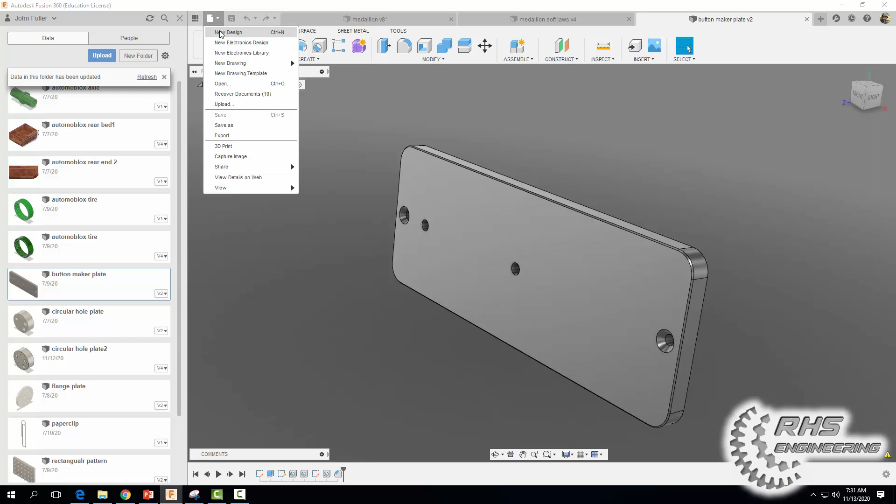Come on up to File and let's select New Design. And as we always do, let's create a sketch here on our XY plane.

First thing we're going to do now is come on up to Create and we're going to draw out a center rectangle. We want that rectangle to be 4 inches. Hit the Tab button by 11 inches. Enter. I'm going to close out my data panel here.

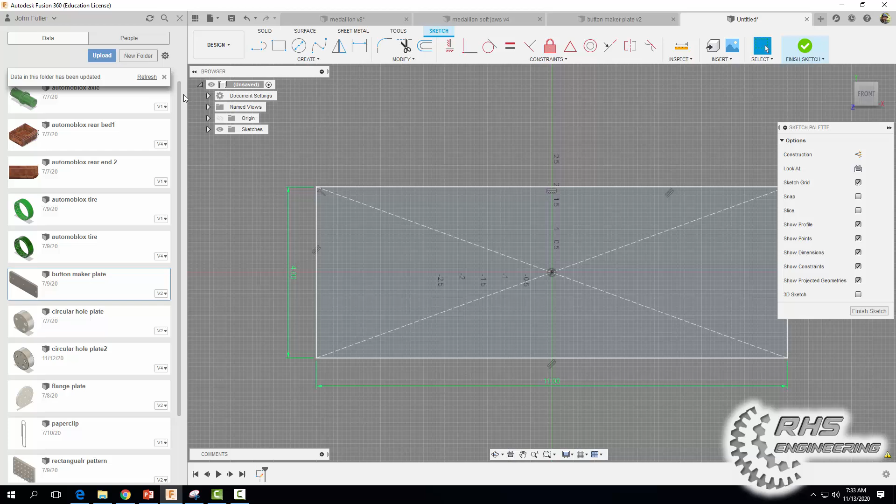And we're going to go ahead now and throw on some fillets here, 4 of them, and we want them to be 0.5. Go ahead and hit enter.

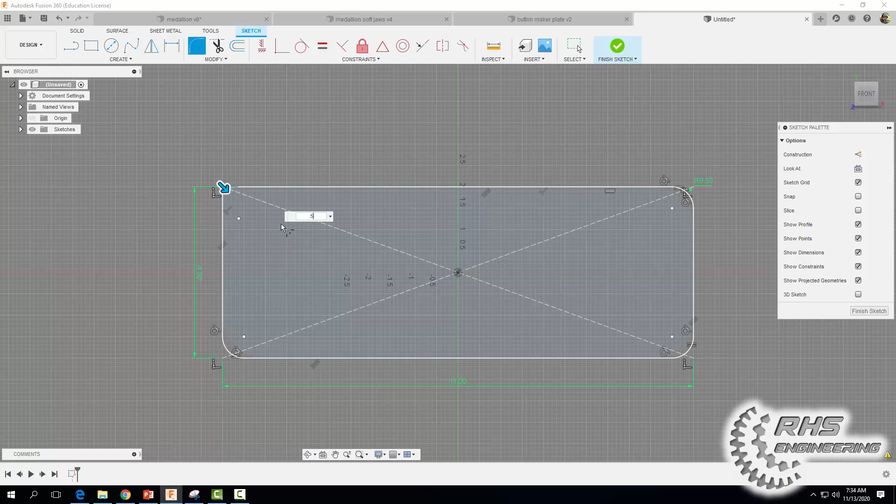Okay, I'm going to hit escape now and just basically delete these construction lines. I'm going to go ahead now and finish my sketch, and extrude out this rectangle to be 0.5 inches here, and hit OK.

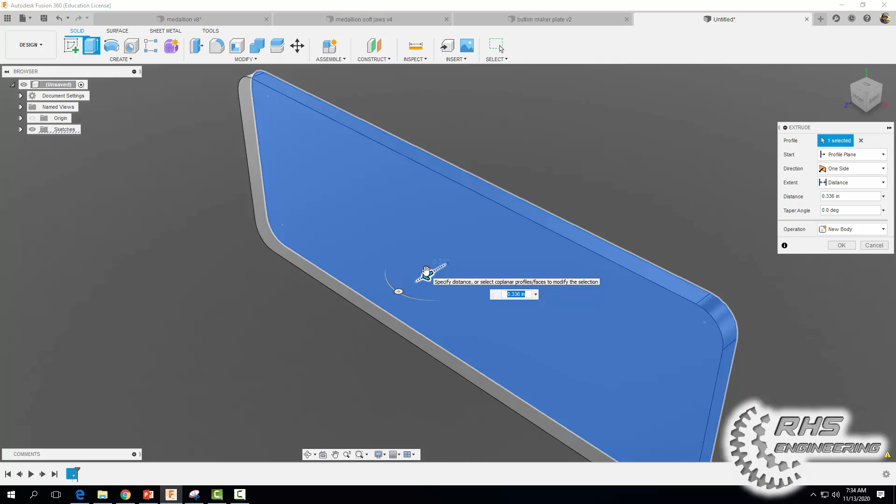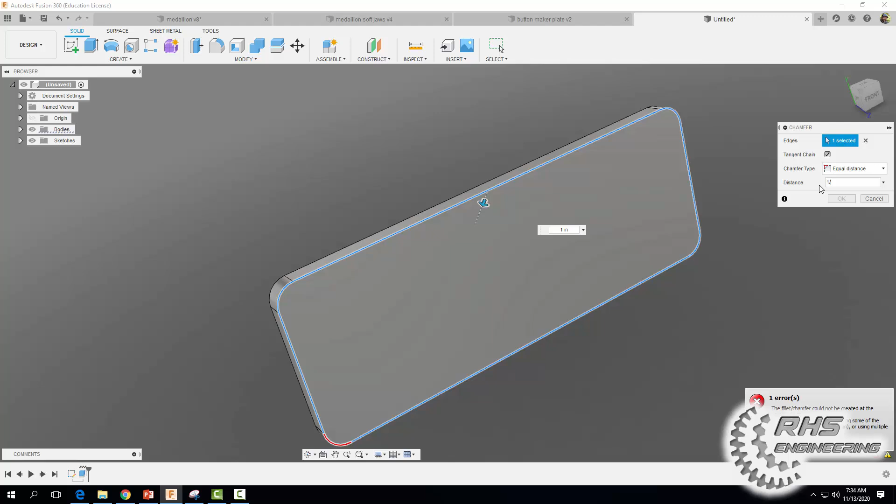Okay, one of the features we need to add is a chamfer along the outer edge here. So we're going to go to Modify, Chamfer, and I'm going to select the outer edge, and we want that to be 1 divided by 32. Okay, and hit OK.

So let's come on over to Fusion 360 again. I'm going to create a sketch right here, and I'm going to zoom in a bit.

We're going to come on up to Create now, and we're going to make a point here, and I'm going to find my midpoint here, well, just which is pretty much right here since we made a center rectangle, and I'm just going to kind of click right over here.

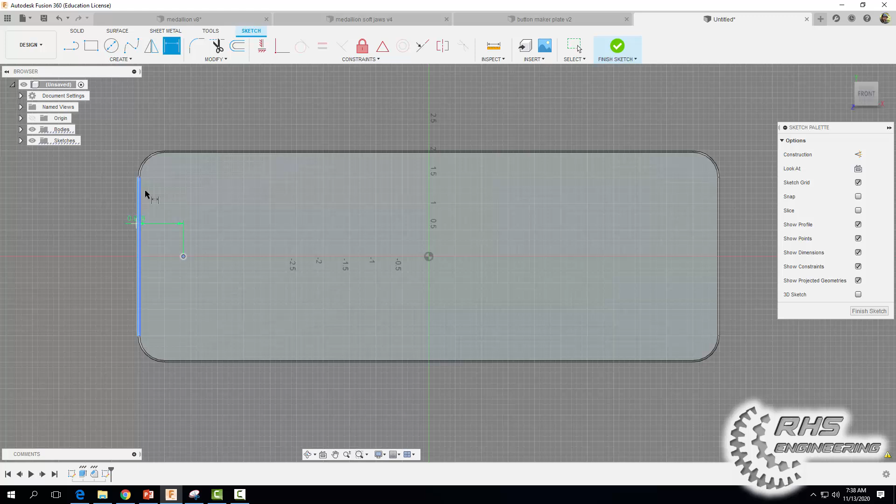I'm going to hit escape, and I want to dimension that guy now from this outer edge to be 0.4375 inches. And then from the top here down to this edge, I want it to be 2 inches. Enter. Now I'm going to go ahead and finish my sketch.

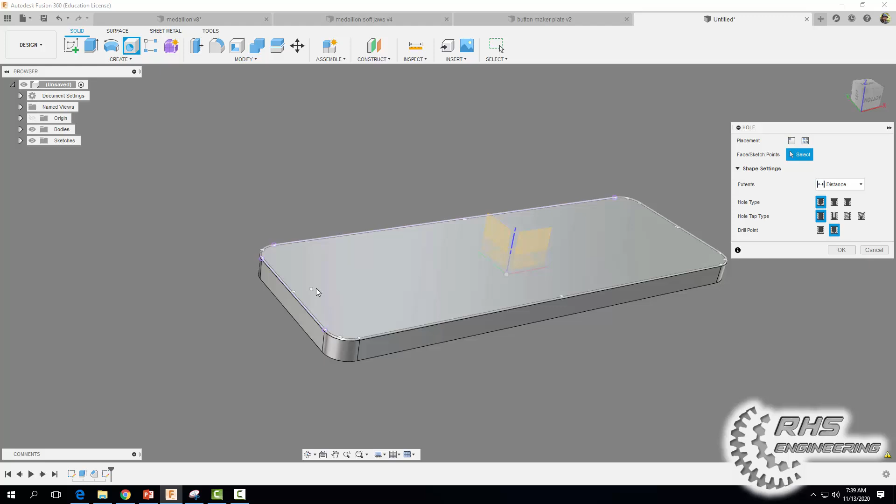And we're going to come on up now to Create again. Actually, we can just select our hole right here, and I'm just going to select on that point we just made. But now we got to go adjust some settings here.

So we want to make a countersink hole. We want this outer diameter to be 0.5. And we want this inner diameter here of this hole to be 0.25. We want to make sure that it's 82 degrees, which is already set with our default value, and we want it to be a distance all the way, then hit OK.

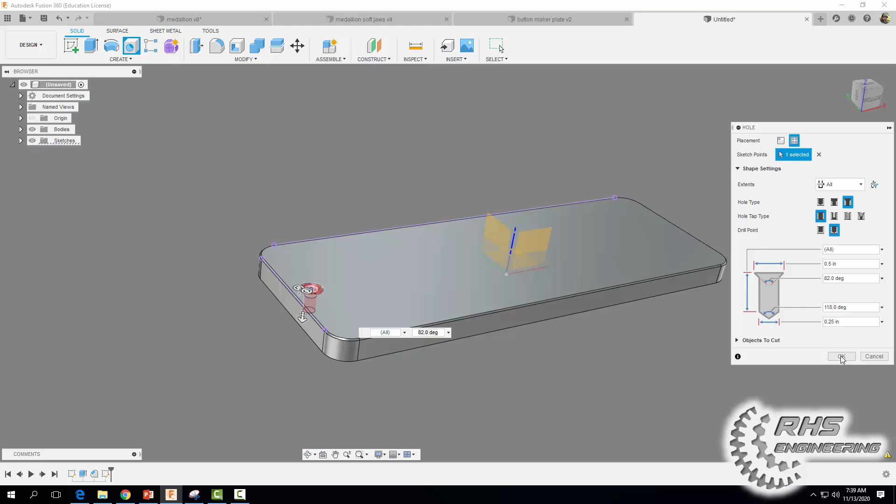So recall, we need to make 2 of them, 1 here and 1 over here. So let's go do that.

All right, so the first thing we're going to do now is come on up to Create. We're going to select a mirror, and it's going to ask what do we want to mirror. We're going to select our hole here. So go to Features, then select our hole, and then our mirror plane.

Well, we want to come on over here. Remember when we start a sketch at the beginning of every lesson, there's 3 planes. Well, those 3 planes are located right here, okay?

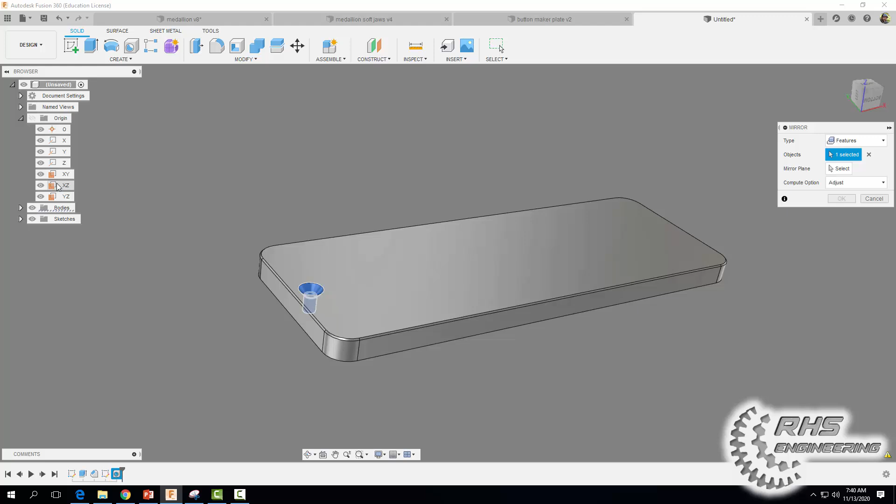And if you click on them, okay, let's go to select here. You can see them, and we want to mirror with this guy right here. So we got to figure out which one that is. That one, that right there, YZ, and hit OK. So we just now made our second hole. A lot easier than the first one, right?

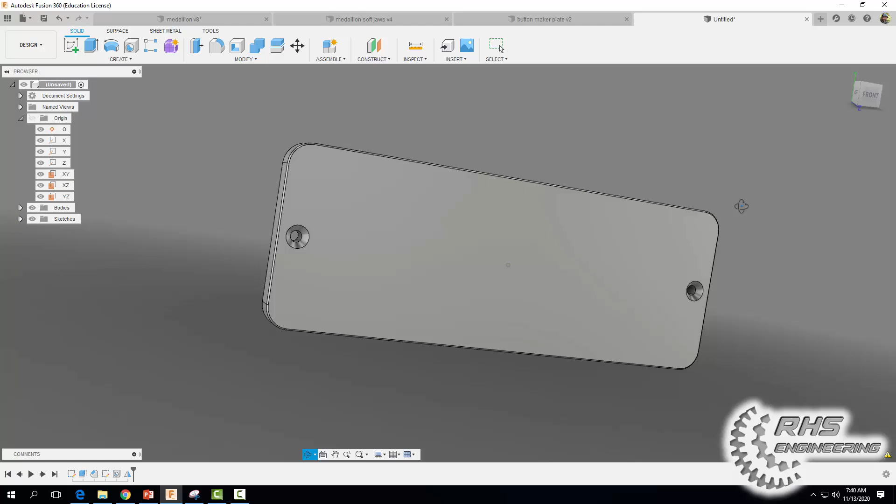All right, so the next thing we need to do is make these 2 holes right here, and both of these are through holes with a diameter of 0.3125 times 2, so 2 of them. So let's come on back to Fusion 360. Let's start a sketch once again on this face, and what we're going to do is once again come up to create and make a point here, and I'm going to just find my origin, and I'm going to drag my mouse out across, and I'm going to place a point, roughly in this area, and then I'm going to do the same thing right back at my origin. So I have 2 points here. I'm going to hit escape.

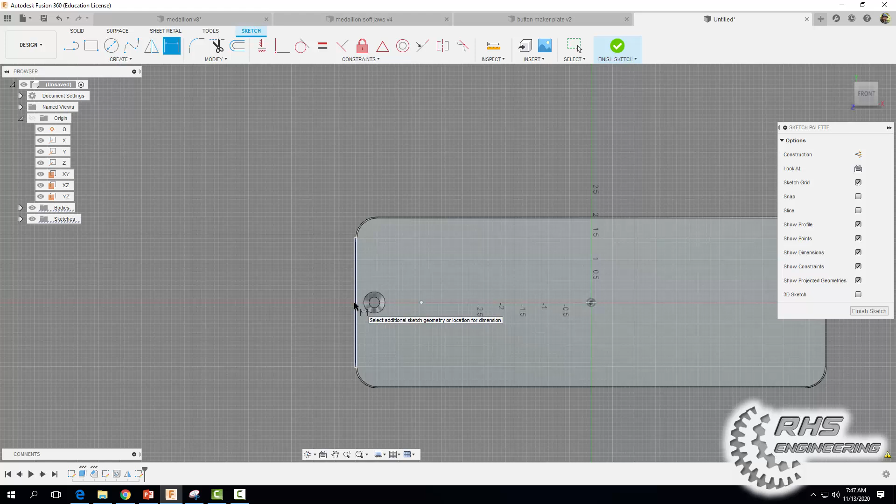All right, we need to dimension this one from this outer edge here. Be careful, don't use the chamfer edge there. Use from the outer edge to here, we're going to make that distance 1.5. And then let me just double check this distance, make sure it says 5.5. Yep. Okay, and if you didn't put it right here at the origin, make sure they're dimensioned 2 inches from the top edge here. Okay, I'm going to go ahead now and finish my sketch.

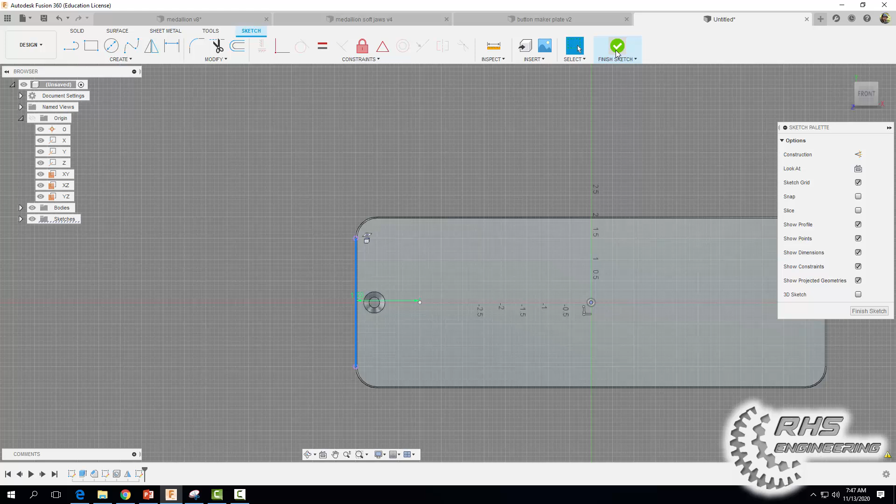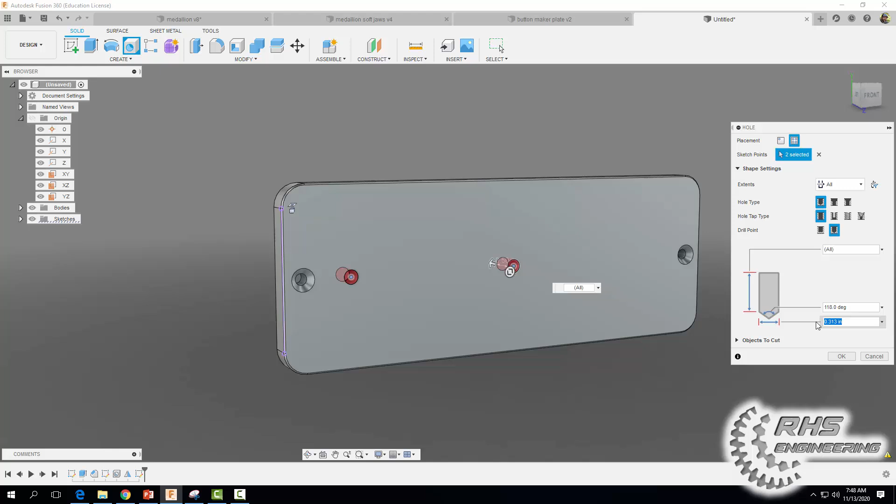I'm going to come down over here to hole, and notice it already picks one of them. I'm going to hold down shift now, and I'm going to click again here on this point. Okay, and we need to change some things here. We need to make a simple hole, all right, with a distance all the way through with a diameter of 0.3125. Hit OK.

And the last thing we need to do are make these 4 holes in these corners here. And these are threaded holes. They have a thread of 8-32 UNC with a depth of 0.2875. And we need to make 4 of them, right? So let's come on back. Once again, let's start our sketch here on the surface. Okay, I'm going to come up to create, and I'm going to come down to project.

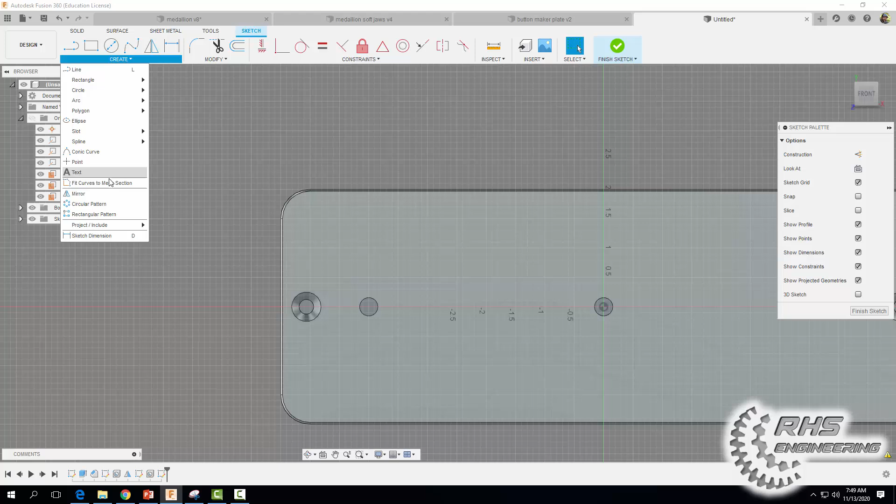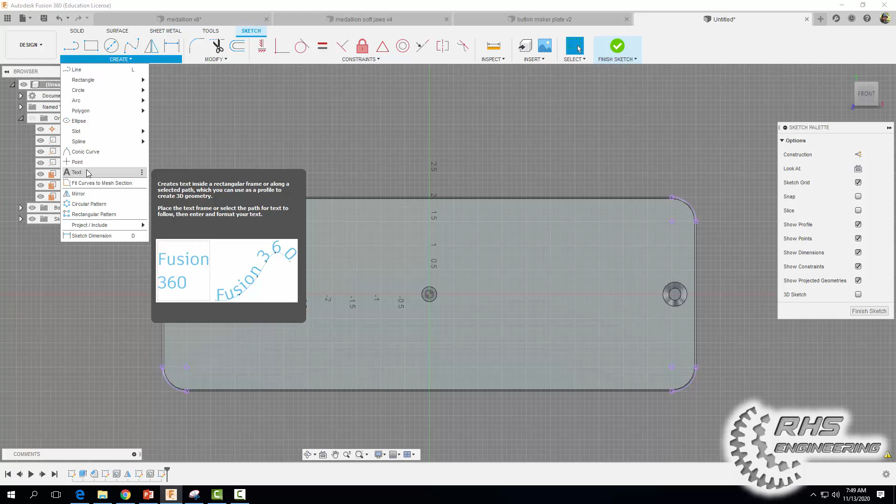And right here on this outer edge, I'm going to click on that guy, click on that guy, click on that guy, and click on that guy. Okay, I'm going to hit OK. Notice these points pop up. So I'm going to go now into create, and I'm going to just go up to my point, and I'm just going to put a point right there, a point right there, a point right there, and a point right there. I'm going to finish my sketch.

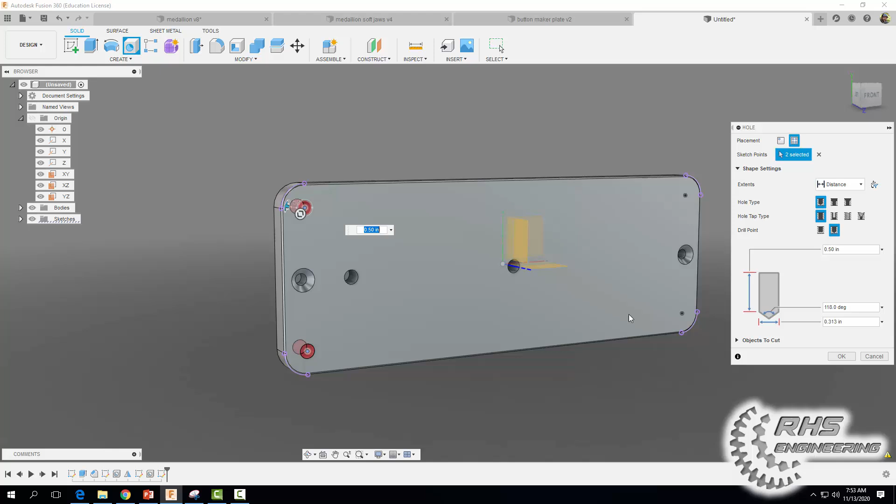Alright, so you probably guess what we're going to do now. We're going to come back up to our hole button. I'm going to hold down shift now, and I'm going to click each of these points that we made in to create our holes. Okay, and we're going to select thread, and we're going to set our depth now to be 0.2875, and we're going to check our size now.

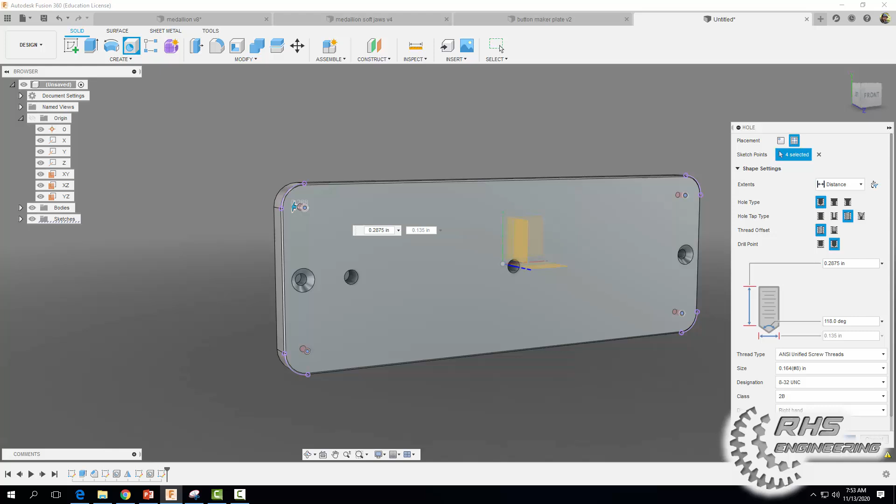We're going to select 0.164. So we have our designation 8-32 UNC threads here. Make sure it's right-handed and hit OK. Actually, go ahead and check modeled if you'd like and hit OK. When you're done, don't forget to save your work, please.